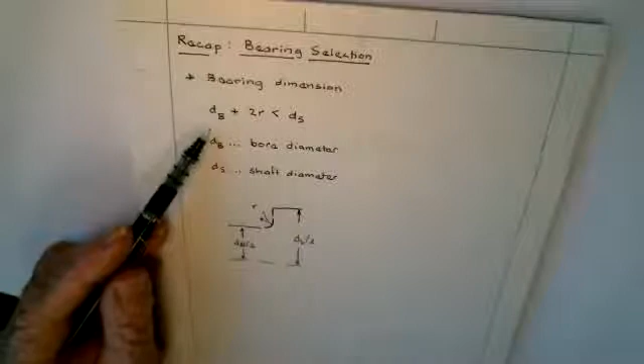So normally when you're picking a bearing, you know the size of the shaft that you're going to mount with the bearing. That gives you the diameter of the shaft, at least the part that you're going to put in the bearing. The shaft diameter may vary at other parts. Then you need to pick a bore diameter. Bore is the diameter of the inside of the bearing. It has to be smaller than the shaft, and smaller by an amount that's at least 2R. The most you can have is this R goes all the way up to the top. And so you do this from table 14.1.

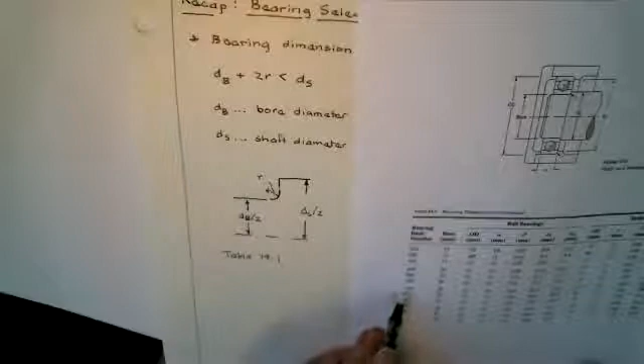Here's a bit of this table. Here's the bore of this bearing, here's the shaft, and here's this little R, which I drew a large version of. Let's say L means light capacity. 2 is medium light. This is extra light, this is light, and this is light to medium. This first number in the basic bearing number decides the load capacity, or groups the load capacity.

The next number is the bore diameter divided by 5. So this is 25 millimeters, or about a 1-inch bore. And so this could take a shaft where the shaft diameter would have to be 25 plus 2 times 0.64, so 1.2, so 27 millimeters or bigger, to satisfy this. You could pick other shafts here, and you could pick smaller bearings.

Usually you want just a snug fit in here, and you tap it in and it fits. Sometimes you use a temperature shrink fit, or you might put the shaft in dry ice and then stick it in there so it fits snugly. You want it to fit snugly because you want the bearing to adhere to the shaft, or at least the inner part in the race of the bearing has to adhere to the shaft.

Once you've done that, then you need to get a bearing that has sufficient life for your application.

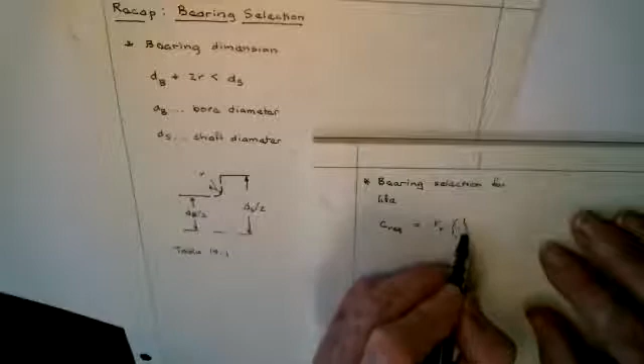What we've got so far is you have a certain required capacity, loading capacity that your bearing must be able to take. That's a standard radial load, or your radial load. The life you want over the standard life for CR, to a power alpha. Alpha is 0.3 for roller bearing, or it's 1/3 for a ball bearing. Here, CR, we'll see required. FR is the radial force that you've got in your application.

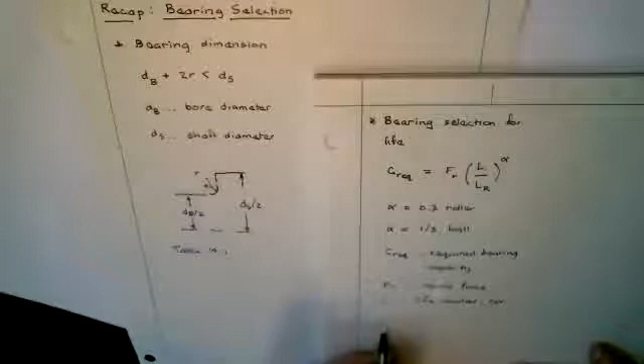You compute the life you want, typically in years, and you look at the RPM and figure out how many revs that means. That goes in here. As it gets bigger than this, it won't increase that rapidly because this power is less than 1, but nonetheless it will make the required capability for your bearing go up. And these are given in this table.

We did a small example of this, but this is the bearing rated capacity C. The LR is 90 times 10 to the 6, that's the same as 9 times 10 to the 7. This is for a 90% reliability. When they generated this table, 90% of the bearings were still going when it got to this life, and 10% had failed. This is the lowest reliability that you usually use for designing bearings. We'll increase that reliability, and there'll be a cost to doing that - you get a higher required capacity.

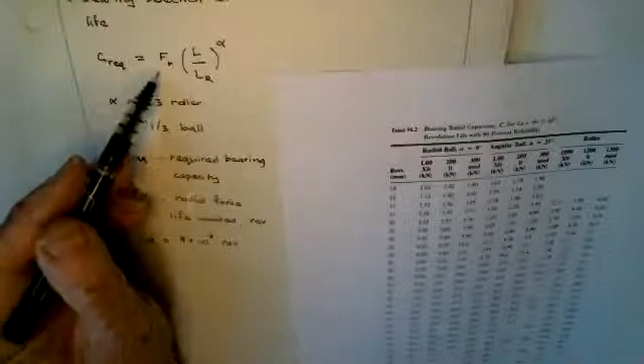In fact, that's the first thing we'll do. Once you've computed, we did a small example, and I'll review that. Compute your life, divide by the standard life, take it to this power, multiply by your radial load, and that's going to tell you what's required.

Suppose you got an answer of 10, and let's suppose 45 millimeters was your acceptable largest diameter. Then you wouldn't be able to use L or 200, but you could use 300. You could do 40 and 300, and you could do 35 and 300. But if 45 millimeters was the biggest bore you could have with the shaft you had, then you wouldn't be able to do extra light or light - you would have to do medium light when you pick off this list.

Quite often when you get to this list, you get more options than one. Generally speaking, you pick the largest one, but they're all acceptable answers. Let me talk about this reliability - you may well want a higher reliability. One of the ways I've seen people do that is take two bearings where one would do, and they both have 90%, then you sort of get to 99%, and when one of them goes, you can replace them one at a time. But there's other ways of doing this, so let me talk about that.

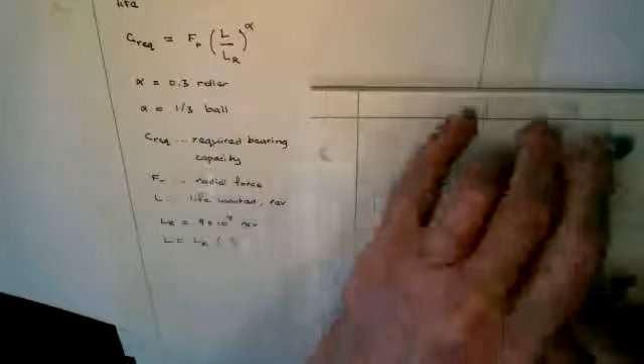There's a thing called a reliability factor. I can rework this and make it the life - well, it's not, this has to be C, really. What's going to happen is this life is going to be reduced when you make the reliability higher.

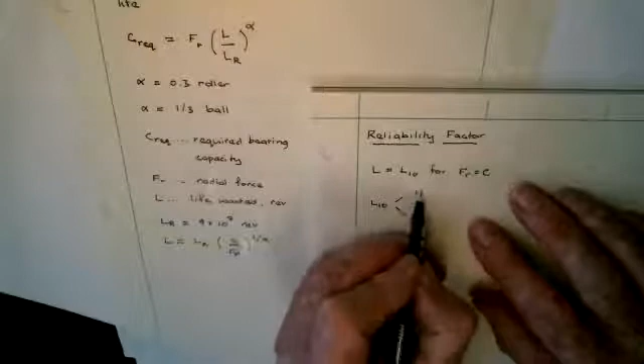When FR equals C, this is 1, and you get LR, and that life then is for 90% reliability, as shown on the top of this list here. What we're going to do is we're going to change this L with a K, with a KR. And KR was 1 for 90%. So your life is going to go down when you ask for more reliability.

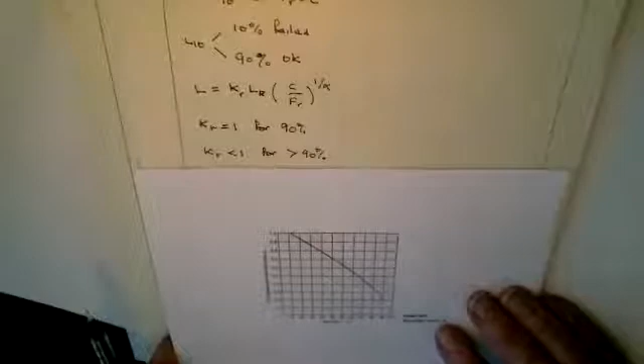The other way of looking at this is what's going to happen here - as this goes down, then the requirement for the load capacity is going to go up. This L would go in here, and here are values of this L. Get these from this figure, 14, 13. For example, if you had 99%, well here you can read this off at 90%, which is the minimum reliability, then it's 1. But if you wanted 99%, it's very close - about 0.2. So your life has gone down considerably, for the given loads.

We'll do an example using this factor and see what happens. It's not that unusual for people to want a greater reliability than 90%.

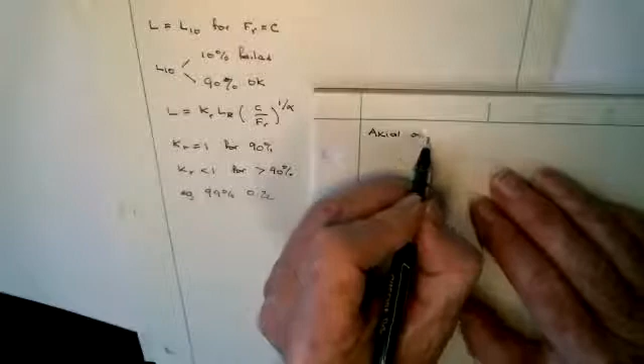There's another thing that happens with these bearings - you don't always just have pure radial loading. We're going to call this FT for thrust. So the radial loading, as the name suggests, was out radially like this. It typically comes from things that are driving the shaft, like gears or pulleys. Axial loading, if we look sideways at this bearing, is along the axis of the shaft, which then, with the fitting I showed you initially, goes into the bearing. It's a little bit dubious to use a roller bearing for this.

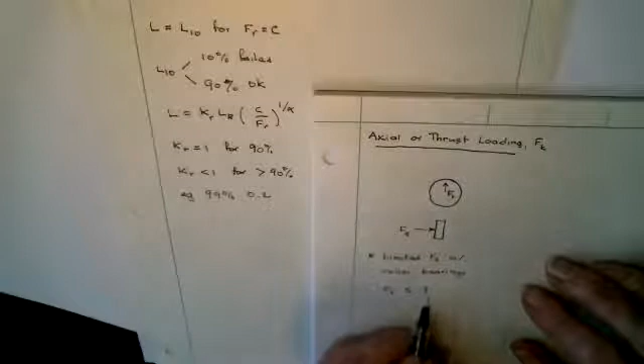There's nothing set up to take it particularly. I would say at most 20%. And sometimes FT is 0.

If you start to have some axial loading, you need to check with the manufacturer of the bearing to see what it'll take. The bearing I brought to school is made in India, so the numbers don't match. The numbers I've been giving you are for US or European bearings, but this one has no axial capability, it just pushes straight out. That's not uncommon, but there are bearings with little racks inside, and the rollers can take a little bit of axial load.

So by and large, we typically use ball bearings to do this. That expression is the thrust loading is less than or equal to the radial loading over 5, correct? That's right. Less than 20. I'm not quite sure where I got that. I don't think that's in the book.

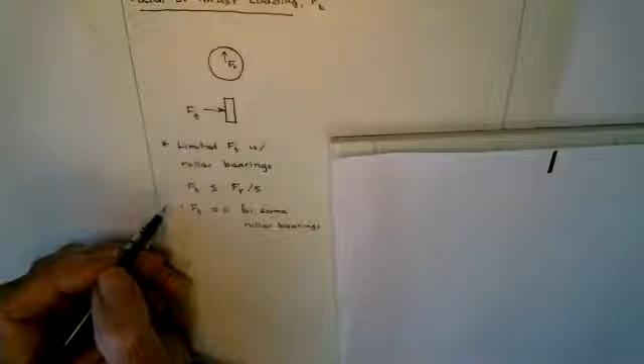But anyway, when you have relatively small thrust loading, maybe your roller can take it. But I'm telling you, what you want to do for this course is just assume FT equals 0 for roller bearings. In practice, you might contact the manufacturer and see what thrust loading his roller bearing will take, but it'll be modest. These thrust loadings can get quite big. So we're going to use ball bearings.

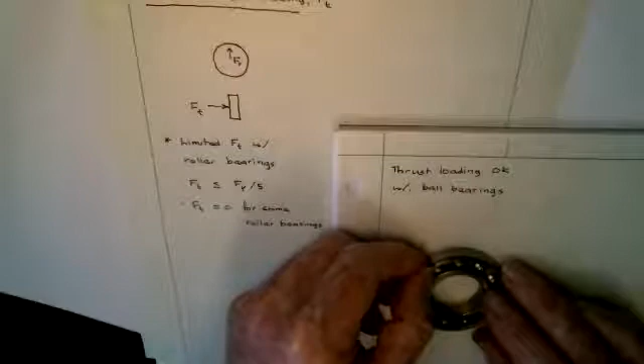You can sort of see this, though I doubt it will show on camera. These balls, which are separated, sit inside a little dip in the outer race and the inner race, not quite semicircular. So the ball itself doesn't go in and out, and this thing has some thrust capability. I'm pushing on it quite hard, and it's not giving.

So what we do then, we will have a loss in life. So we're going to put the force up to an equivalent force, Fe, which is greater than or equal to Fr.

If Ft is modest, less than 35%, then Fe just equals Fr. There's no effect. On the other hand, if you have high loading... does that mean FT is less than FR times 0.34, 0.35? I'm confused by that inequality. Yeah, no, that's a divide.

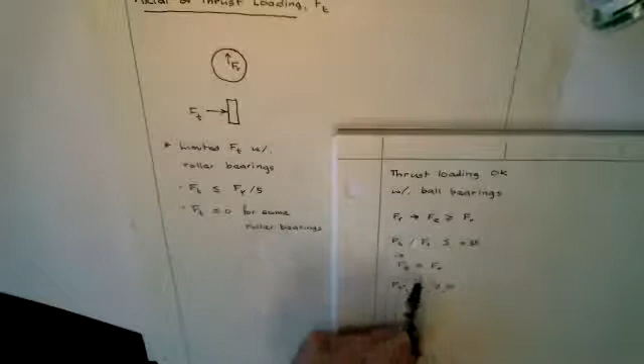That's given by equation 14.3, and I don't wish to write that out right now. We'll use this equation later. I'll get rid of the book in a second. This is an expression here. When Ft upon Fr is 0.35, this will just give you Fr, this will be 1. When Ft upon Fr is 10, then this part here turns Fr into Ft, multiplied by a number that's slightly bigger than 1.

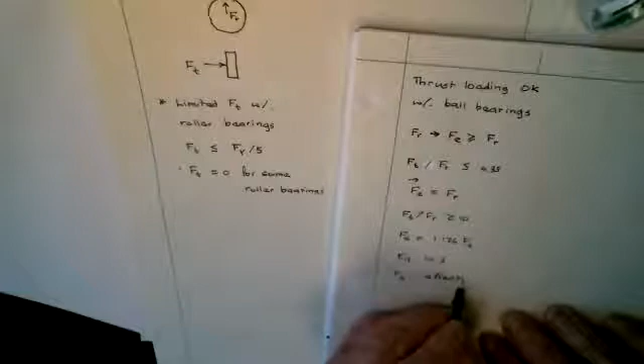What does Fe represent again? Fe, that's a good question. Fe is the effective loading. So when you've got expressions like this, you're going to put Fe in here for Fr.

These are radial ball bearings. What I just did was radial. There are some thrust ball bearings.

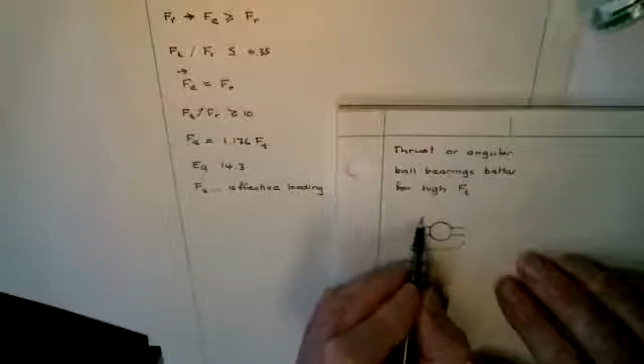The way these ball bearings usually look is as follows. When they're angular... that's a radial. When they're angular, this side comes down, this goes up, and it can transmit more force as a result. There's an angle here, and the one you've been given is a standard angle of 25 degrees.

Instead of 35%, you can get FT up to 65%, and you don't have to change FR. FE is equal to FR. And when you get this very high loading, then FE is a bit lower. And in between, you use equation...

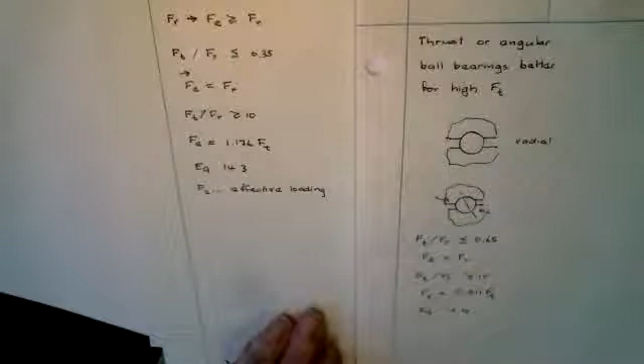14.4, which just looks like the previous equation. It'll give you these limiting values here, it's the same as in the book. It has FT over FR less than 0.68, I believe, not 0.65. Should we use 0.65? No, you're quite right, I made a typo. Yep, that's 0.68. So not quite double what the radial bearing was.

Now, you can do something like this with roller bearings too. The only bearings we're going to use in this course are radial ball bearings, radial roller bearings, and axial ball bearings. That's all you need to worry about. But you can do things with roller bearings. Let's see if I can show you this.

You can see that this thing here is sloped. When you put it in here, this will take the thrust loading in one direction. If you push it the other way, it'll come straight out. So in practice, there are ways you can get roller bearings to take thrust loading, but the straight roller bearing, basically, you're at risk.

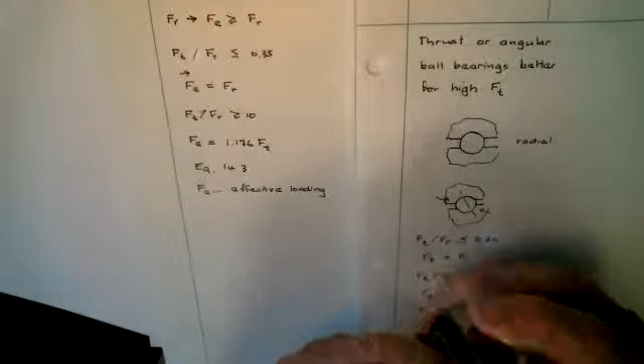The ball bearings do a better job because of the constraint on the rolling path. So in that case, why make roller bearings to bear a thrust load?

Some of these roller bearings can take very high thrust loads. Yes, it's a fair question. I would say this roller bearing - I don't know this for sure, I've tried to look these things up - but this is a Timken bearing. This one I could look up, but this is made in Japan, so I don't really know what they can take, but this will beat this. It's an effective way of doing it.

Why do that rather than an angular ball bearing? I'm relying on the last time I worked on this bearing selection. I think this takes actually slightly higher thrust loading.

I can't see what you're using. It's not in the picture. Your hands are not in the screen. Oh, I'm sorry, yeah, okay.

So this will take a slightly higher loading, I think. There will be some reasons why you would select this. When you do a problem, you wouldn't have to change your requirements too much to not have a radial angular bearing - you might be able to get a roller bearing and still get that in there and keep your friction down. Otherwise, then you're going to go to a journal bearing. But that's just my recollection, that this sort of bearing takes even higher axial loading than angular. I'm not 100% sure of that.

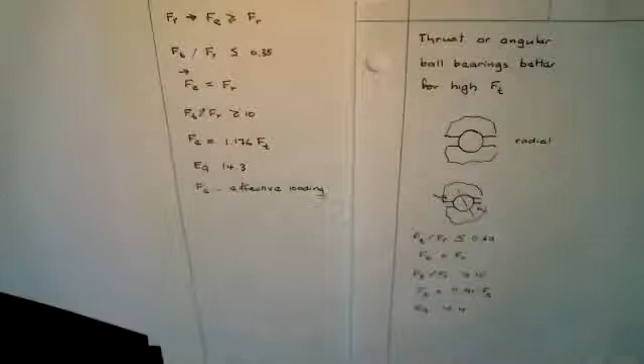There's another thing that happens with these bearings. You try to avoid this, but you can have some impact loading.

Now, when you think about your gearbox, impact forces - this should have been in machine design 1 - impact force is V root MK. You might want to say delta V, the relative velocity between two bodies that hit. This is the mass involved and the stiffness, the mutual stiffness. The stiffer you make it, the higher force you get. The more mass involved, the higher force, but it goes as a square root.

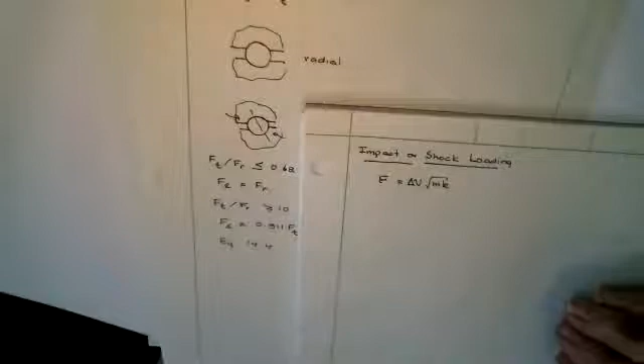And when you have a difference in velocity, it's linearly proportional to that. This is the engineering formula. There's a better way of doing it than physicists who use momentum exchange, which might get you an average. So when you change gears, even with synchromesh, when the two gears come together, there'll be a slight difference, and so there'll be some slight loading there. Now, one of the things that's forgiving about that gear example is that it only happens when you change gears. Once they're meshed, then there's practically zero impact loading.

What we're going to do is account for this by increasing FR by an impact factor. And if you have an equivalent FR because of thrust loading, then we'll increase it by the same factor. To have no impact, Ka is 1.

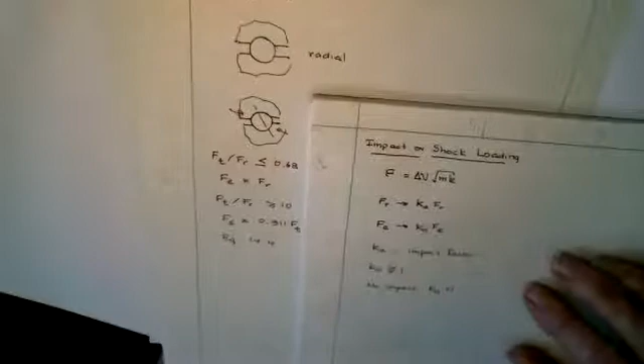If you have light impact, it gets up to about 1.5, and you get this from a table. What is light impact, greater than 1? Yes, 1 to 1.5. And you get this from table 14.3 - let me show you this table.

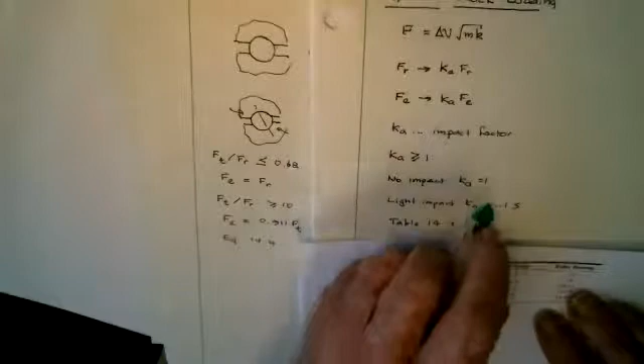It's on the same page. Uniform load, no impact, then you don't have any factor, of course. Gearing with ball bearings 1 to 1.3, and for the roller, no significant effect. Light impact 1.2 to 1.5, so I should have put 1.2 here to be consistent with the book. And heavy impact 2 to 3, so a major increase for ball bearings, and a significant increase for roller bearings.

What do you do when you're looking at this table and you've got this range? Well, in practice, you ask the question: how often does this impact occur? If it occurs a significant fraction of the revolutions - what's a significant fraction, more than 10% - then you use the high end. If, on the other hand, it only occurs once when you start things up each day, then you use the low end. So that's in practice. What do you do in this course? You do the conservative thing - just take the highest value of each of these.

Okay, so to summarize what we've just done, we have the following. Putting these things together.

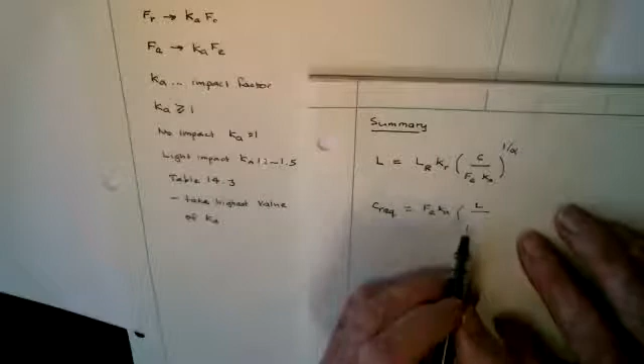So you can see the impact factor is going to increase the required capacity. The thrust loading is going to make FE go up typically, so it's going to increase the required capacity. This KR, this reliability factor, is going to make this number bigger, so it's going to increase this, and this will be to the power alpha.

So let me revisit the last example we did and put some of these factors in.

Dr. Sinclair, where would vibrations fall into this? Maybe—it's a good question.

The vibrations would probably just increase your loading. It's unusual for vibrations to be an impact factor, but you could put it in as a light impact factor, I would think. Now if the shaft is vibrating and it's hitting something, well then, of course, you're going to have a serious impact factor—that might even be high. But as long as it's not hitting anything, I don't think it has much of a factor.

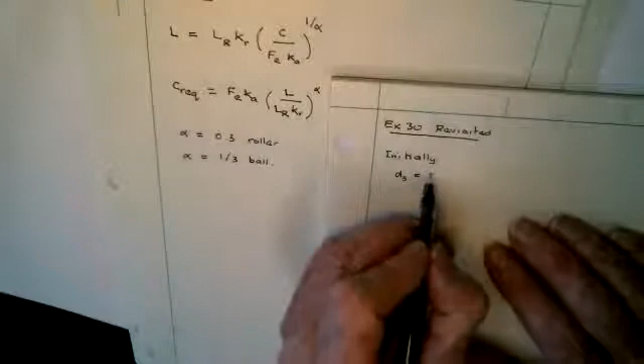Initially, we had the shaft diameter was 50 millimeters, FR was 1.2 kilonewtons. A kilonewton is about 220 pounds force, almost 5 kilonewtons to a kip, so it's a sizable force. It was going to run for 8 hours a day, at 1800 RPM, for 10 years.

And what I didn't tell you is implicitly, we're going to take a reliability of 90%. And we had to pick a bearing. I did this before, so I'll just summarize what we got.

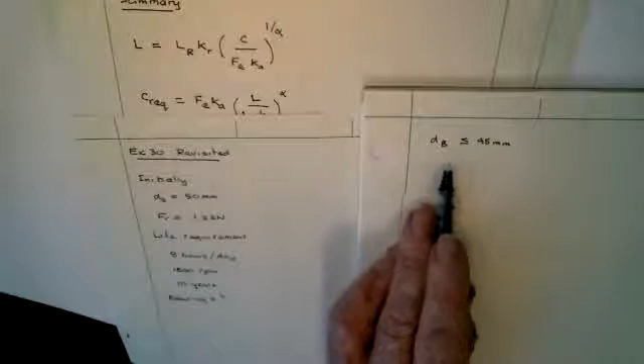From our table—I didn't print off the whole table—we went and found that if you had 50 millimeters, dB 45 plus 2R, whatever the R's were, I think they're about 1, was less than 50. So this would work. This was the biggest we could have; we could have something smaller than that.

We converted this life. We multiplied—this is revs—minutes to per hour for 8 hours per day, the number of days into years, and you multiply all these things together, and you get 3.19 times 10 to the 9.

So C required here would have been the 1.2—I've taken out a factor of 10 to the 7. And we were picking a ball bearing, I believe—yes, we picked a ball bearing. And we found that the required capacity when we did this calculation was 3.93.

And I picked up a bearing from this table that did this. 45—all of these bearings, I'll move this under—all the 45s do it. So any of these would do it, okay? You could go down smaller. Eventually, when you get down to 30 millimeter bore diameter, the light one won't do it, but these two will. And you can even go down further with the heavy duty, down to 20 millimeter bore diameter. So there's a bunch of bearings you could pick here.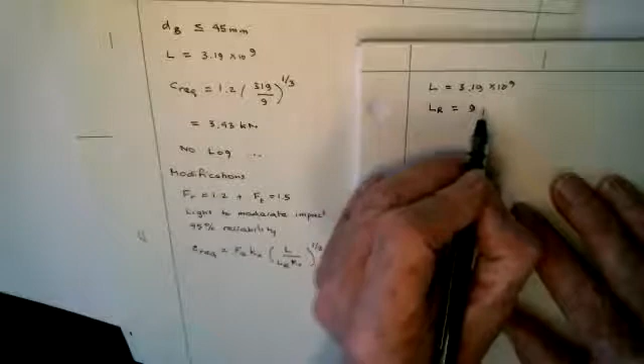So we've got to go get FE. Well, we know what L is, L was as before. And we know what LR is. We've got to go get KR.

We want 95%. So here's 90%, KR is 1. 95%, that's between 0.6 and 0.7, looks like about 0.63 to me. That's all the things in here. KA.

There's a ball bearing, okay, and we said light to moderate impact. Well, I think you would take the top end of light and the bottom end of moderate here. So if somebody tells you moderate to heavy, you take this midpoint. If they tell you heavy, you take 3, okay? If they tell you light to moderate, then you take the common point here, okay? If they just tell you light, you take 1.5. If they tell you moderate, you take 2.0. We always take the conservative, but light to moderate means we just take the common factor, the end point.

I have a quick question. Is there a difference between a radial bearing and a ball bearing?

Radial ball, the word radial, ball bearings, standard ball bearings are all radial, okay? The balls, the tracks are lined up like this. Well, my drawing leaves a bit to be desired, but the axis of the ball here, where you bisect the little circular part it's sitting in, goes out in the radial direction. That's perfectly radial, and I tried to sketch it before.

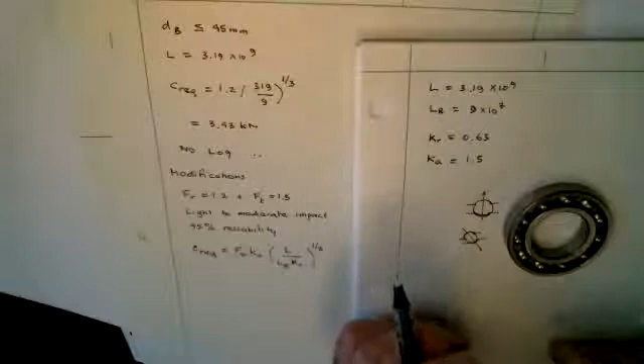Now we have to. Is that answer your question? Yeah, okay. Yes, thank you.

Okay. Now, so we've got this. Now we've got to go get FE, and I'll get that formula from the book, which I didn't write out before. It's quite lengthy. It's going to be between 0.35 and 10, so it's FR. Let me know if I make a mistake.

This is because, and actually it's also less than 10, okay, but you can see when FT upon FR equals 0.35, this is 0, so you just get FE equals FR, just as we agreed. Actually, if you take FT upon FR equal to 10, and you put it in here, you will get the same thing as I gave you before, 1.1 something or other times FT. So we got to calculate this now.

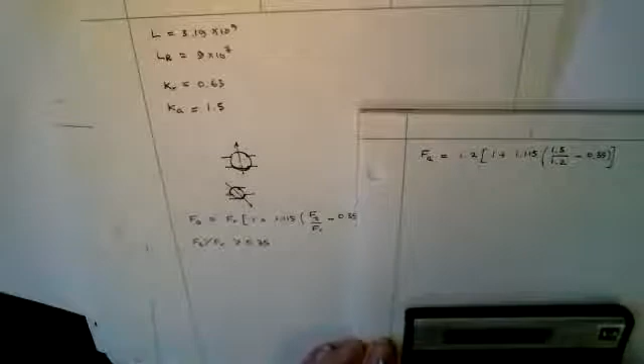So I substitute numbers: 1.2 for FR, we said 1.5 for FT. At 1.25, about 0.9, this is very close to 1. There's going to be 2, so it's going to be about twice as big. 0.9 times 1.

Yes, it's 1.003, so 2.4. So then the C required. That's for our FE. I'm doing this thing, KA 1.5. I've taken out a factor of 10 to the 7th, but this is times reliability factor 0.63. Well, that's obviously 3.6, but let's see what this is. 55.6.

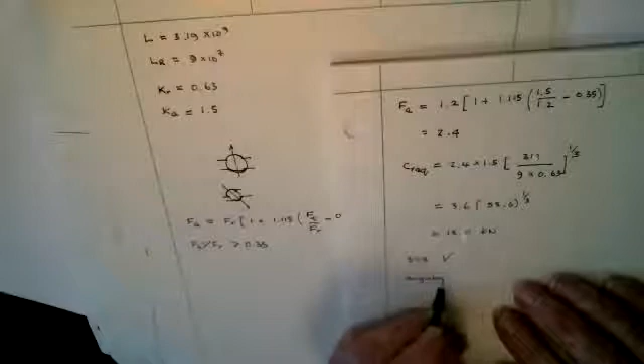Well, this KR, this reliability factor for 95%, that's independent of whether it's radial or angular, it comes from the same chart, okay? So it doesn't change. And KA comes from the same table, and it just distinguishes between ball and roller bearings, but it doesn't distinguish between angular or radial ball bearings. So since we said light to moderate, then we picked the common point between the two.

That's unchanged, but this FE changes. So now we get the formula. And the formula used to be FR was the formula here. Now the formula is...

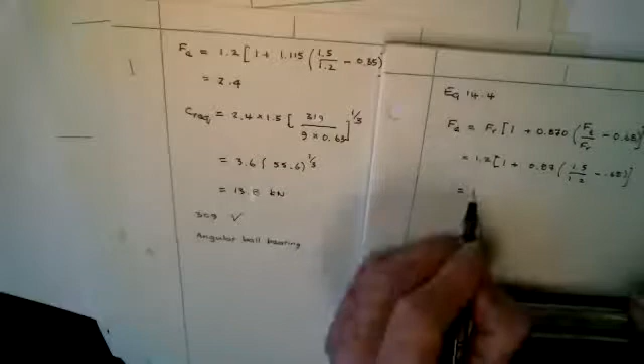Okay, so if we compute this now, 1.2... it's turned out to be 1.8 basically. It used to be 2.4. So what's going to happen is C required is going to go down. C required has FE out here in front. We just reduced FE by 25%.

10.4. Let me just put the office light back on.

So now when we go to our table, 45 millimeter bore is still the biggest bore we could have. We can't go higher than that. But we went 10.4.

Actually, the 200 would do it, right? It's right at it. Okay, and the 16 and the 300 would do it. We'd have two. But we have another two 300 level bore bearings with a smaller bore that would also work. 13.2, 11.0. So there's a number of bearings.

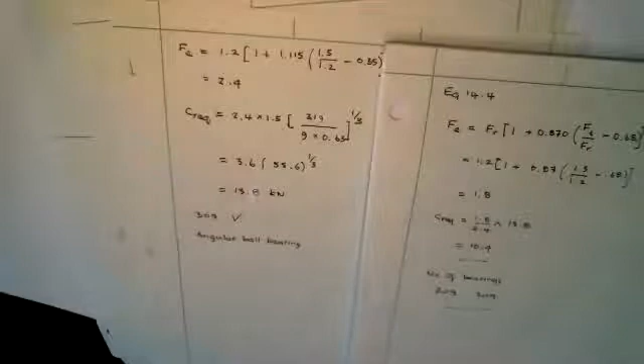Well, that's about all we're going to do on bearing selection. I'm going to move on to the next application. Do you have any questions before we move to gears?

Okay. What a lot of this sort of stuff is in practice is there's lots of looking up at tables to get the things that you want.

All right, well, the next application I'm going to look at is Spur Gears. This is in Juvinall and Marshek, chapter 15. What are we talking about?

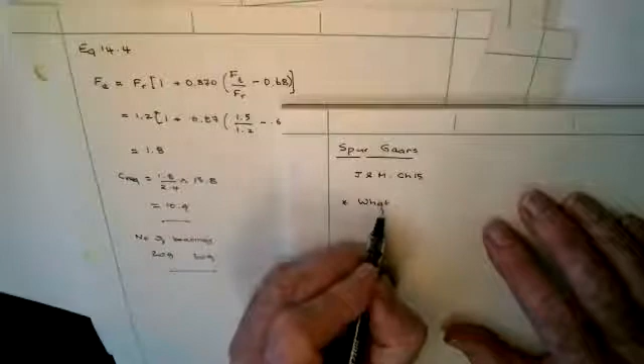Something like this, okay? These little spurs come out here. They're uniformly spaced around here, and you mesh this with another one, typically of a different diameter. So what we're going to have here - I'm not going to bother drawing all the teeth or spurs.

Although we'll look at this in a little more detail in a moment, you typically have a different size between two meshing gears. In which case, the bigger one has DG, pitch diameter.

And the G stands for gear. It's common to call the larger one the gear. The smaller one is the pitch, is the pinion.

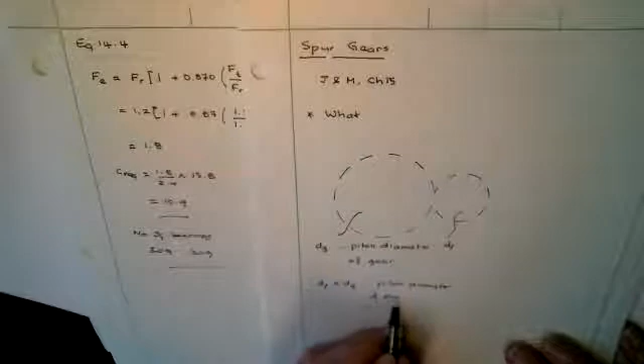If they're both equal, they're both gears. You'd have them both equal when you're trying to shift the line of rotation laterally without changing the speed.

And if we look at this in a little more detail, there's the following. Let's see if I can get this from here. Okay, so these things are curved shapes like this. There's a little radius there, okay?

Then there's a pitch point here, which you can think is - there's more than one definition of it - but as the point of contact. Well, contact actually moves up and down along this. We'll talk about that in more detail subsequently. But this is perhaps the mean point of contact you could pick out.

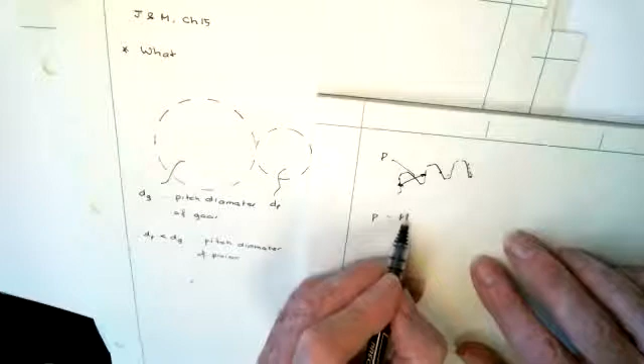Then the pitch is the distance from this point on this tooth to the same point on the next tooth. This out to this point here, to the center of the gear: DG or DP upon 2, okay?

So if we take the entire circumference of the circle of radius d upon 2, then its circumference would be pi d, and that'll be NP - number of teeth.

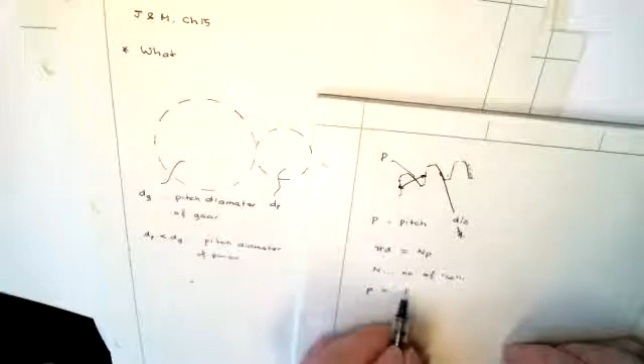Okay, so that means a D, or P rather. So for the gear I had here, D is about 4.5 inches. I counted before class, there are 30 teeth. So P is about .47 inches, nearly half an inch. It's a large gear. You can get smaller P than this.

There's another pitch which is used. This pitch here, P, can be in millimeters or inches. In the US, it's typically inches. In Europe, millimeters. Yes, I use - so that's changing.

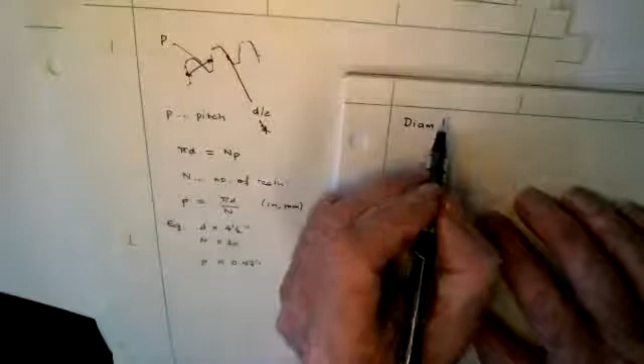But a common alternative definition, which is essentially equivalent, but you're going to meet this, is called the diametral pitch. I'm going to use the same symbol as the book, P - P is used for a lot of things. But anyway, P, and units are teeth per inch.

Well, we can solve these two for n. P, uppercase P. It's also n is lowercase p. So these two just equal a number pi. You lose the inches. So if they give you this, you can convert it to this if you need to. You may well not need to.

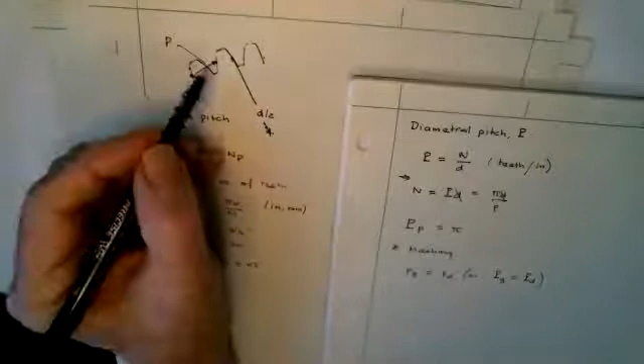Independent of which pitch you use, here's the requirement for meshing: that physically the separation between the teeth has to match. And I have this little figure here. When you're bringing in another gear, then this distance here has to match. That's sort of why I prefer this, but you can get the same result here.

That means that dg upon ng equals dp on np, where this is the number of teeth in the gear, the number of teeth in the pinion. This would be bigger than this, as with dp.

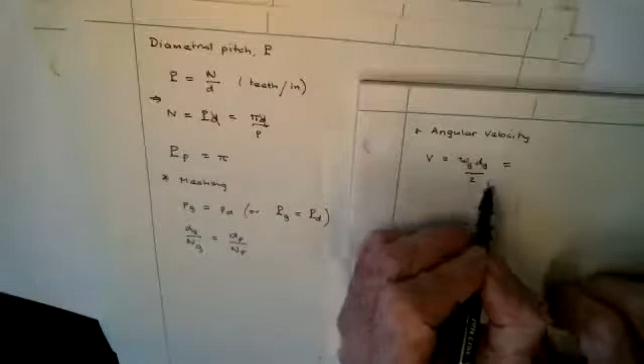The angular velocity of these - you have a common velocity at the pitch point, which is where we measured the pitch at the time. And so that common velocity would be v of the pitch point, and that would be omega g, dg upon 2. And it would, the velocity here, it's actually in the opposite direction, minus omega.

So this point has a common velocity v. If we say omega is positive clockwise, then this one's turning counterclockwise. You get a minus minus, and you get the same v.

So what we're going to have then is, for meshing, omega g, it's going to be d - and these d's were inversely proportional to n. Did I get this right? Half a second. It's going to be NP.

It should be N, over, yes. I'm sorry, D is... I was looking at this formula, looking at P. D is directly proportional to N. Yeah, I was about to write down something that didn't make any sense.

Okay, that's fine. If you have an even number of gears, 2 or 4, in a line like this, then you'll get a change in sign of omega. So if I had 2, then you get a change. If I had 4, another 2 here, then there'd be a change in sign here, another change in sign, then a third change in sign, so overall it'll be a change in sign.

On the other hand, if you have an odd number, then now it's going the same way. It started off clockwise, counterclockwise, clockwise.

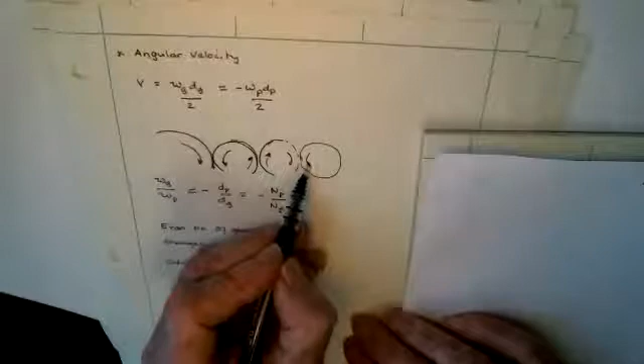Let's see, this would be up. Yeah, there's still a change of sign, right? This is still going down. Okay, there's a change. This one here is going the same as this, so there's an odd number, 3.

Dr. Sinclair, on the previous page, on the expression you had for meshing, you had P subscript G equals P subscript D. Did you mean for that to be P subscript P for pinion? Oh yes, yes.

I can tell you why. More often than not, you drive in the pinion, so you call it a D, but no, that's to be consistent with what I did. You're quite right, it should be P. Okay, so quite often the incoming drive is from a pinion, and so sometimes you put a P sub D, but I hadn't done that. What I did was incorrect. You're quite right.

There are gear forces. If time permits, we'll deal with these a little bit more because these are going to have bearings on life.

I tried to draw that tooth using the actual gear. It's got a shape like this. The resultant force is not normal to the radius, okay, and so there's a radial force and a tangential force.

And these are on it: when you mesh your teeth, you have essentially contact on one set of teeth, one from the pinion and one from the gear. Okay, and then when that starts to cease, the contact starts with another tooth. That's not 100% correct, but it's pretty close. And these two are related by a pressure angle.

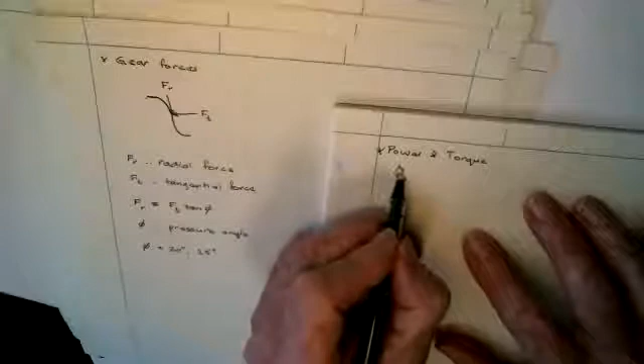However, when it comes to power, and you get that from torque, and the torque is all generated by Ft. Well, now I'm going to put a hat on power just to distinguish it from this other pitch, the diametral pitch. So it's going to wear a hat, and that's just T omega. Okay, power is force times velocity, or in an angular situation, it's torque times angular velocity.

And T is going to be driven by this Ft. It's going to be Ft times the radius. Okay, you can turn this around and you can get this tangential force from the torque you're transmitting.

One last element of these introductory notions about gears, let's talk about efficiency for spur gears. Here's the power you get out, divided by the power you put in.

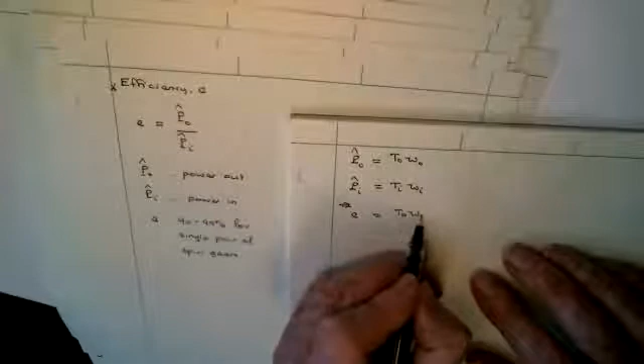If we use this efficiency, we can use this: that's going to be the output torque times the output angular velocity. And likewise, there's the input torque, so therefore the efficiency, or you could make the output torque, which is what you often want, is going to be the efficiency times T-I times omega-I over omega-O.

Just to get the magnitude, we can switch these up, inversely proportional to the number of teeth. I'm not keeping the sign here, okay, N-O over N-I, so it's magnitude only. These torques are going to change direction just like the way omega did.

So to summarize what we've covered so far, we have the following for Spur Gears. And I'll do an example.

That's the pitch, which is the physical dimension between two teeth. Here is the common diametral pitch used in the US.

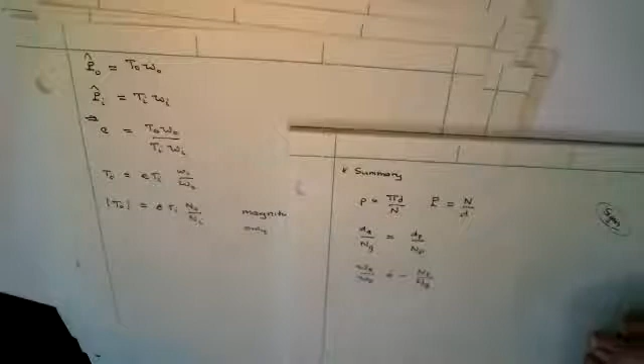Angular velocities with one pair of gears, you get a sign change, and they're inversely proportional to the number of teeth. This is G upon P, this is P upon G, that's not a mistake in sign, it's just for one pair of gears. If you get enough of these signs, an even number, then there won't be any change.

When we start to design bearings for these gears, shafts, then we'll need to start computing these forces and getting resultant forces. The torque that creates the power is really due to the tangential component of the force.

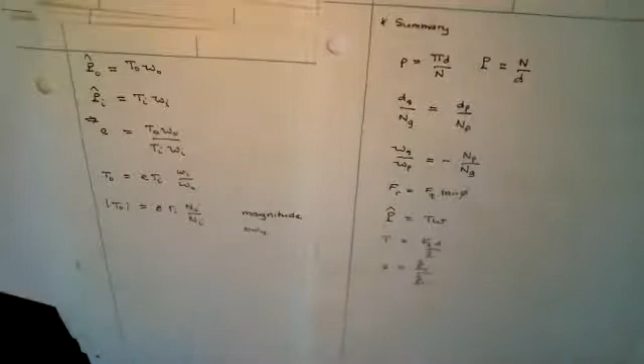Efficiency is the power you get out from the power you put in, less than one, but not that much less.

This is magnitude. Well, let me do an example of use for you. Let me show you what I mean by reduction gear set, though there's more than one of these.

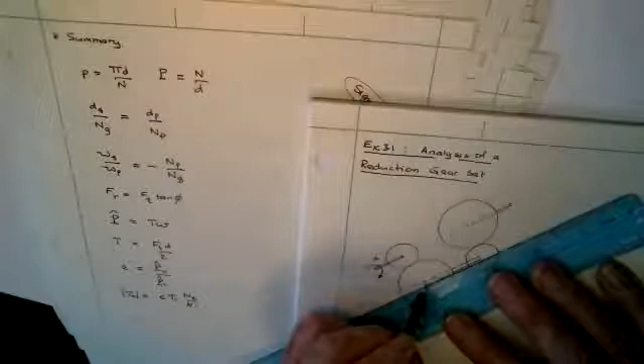So I'm going to drive this pinion with a motor. There are 3 shafts here. Just to keep things simple, I'm going to keep this, which will help line these axes up.

Now there'll be a sign change in omega here, and that'll be reversed back here, so this is going to spin, the output here is going to spin in the same direction. This is not in defiance of what I said earlier about an even number. It's an even number in a set of gears all joined, okay? This is 2 sets, okay? And there's a change of sign here and a second change of sign here. So this thing here is spinning the same way.

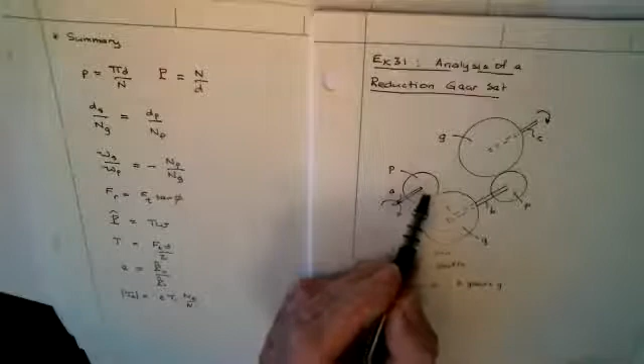Of course, as this does a revolution, the small gear only does a part of a revolution. And then as this small gear does a revolution, this thing does only part of a revolution. And so that's why it's called a reduction. The speed goes down.

What will happen then is we'll lose some power because of efficiency, but then the torque will go up. So when you have a reduction gear set, it's common practice, you have a high revving motor, the revs will go down, the output revs will be lower, but the output torque will be higher.

Here's some specifics for this gear set. The pinions, given in US units, P equals 5. The number of teeth is 15, and phi is 25 degrees.

Since you're going to mesh this, then you don't really need to write this, but P will again be 5, and phi will be 25. Okay, otherwise you will have poor meshing. Well, in fact, you won't mesh. But N is 45.

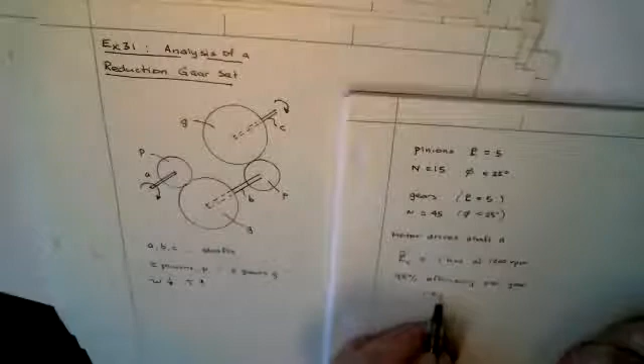I would like to find out what the output is from shaft C. Okay, so what we've got to do is get a little shopping list of things we have to do here.

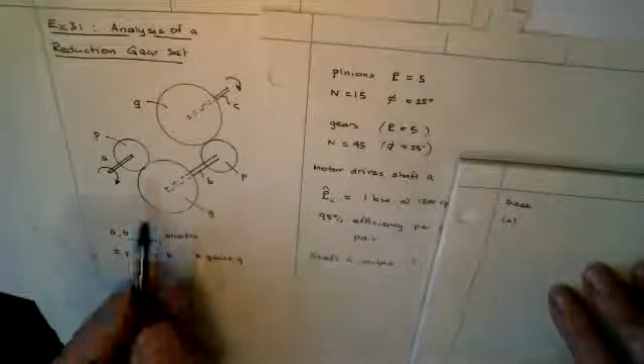What we see, well, part of the output will be what's its omega. And to get that, we're going to have to get omega for B and C. Then if we want to talk about output, we want to know what torque is. We'll have to get that for A too. And we want to get the power that came out, at least in this first exercise.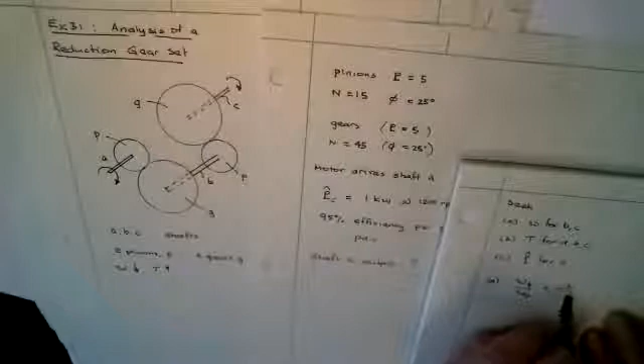So for A, this is a G, this is pinion. It's minus NP over NG. So omega B, which is the gear, equals omega A. This was 1200 RPM, which is a standard unit to give angular velocities for gears. When we start to work out power, we're going to have to convert from RPM to radians per second, but when you're talking about output, then RPM is the standard thing. The minus sign means in the opposite direction. I gave this direction, but irrespective of whichever direction I gave here, this is the opposite. And this is NP, the number of teeth in the pinion, over the number in the gear, is 45. This is minus 400.

Likewise, omega C, it's the same arrangement. It's minus omega B times NP over NG. So you'd reduce this again. 400, 133 divided by 3. And now, to answer your question, the key thing is this is the same direction as A.

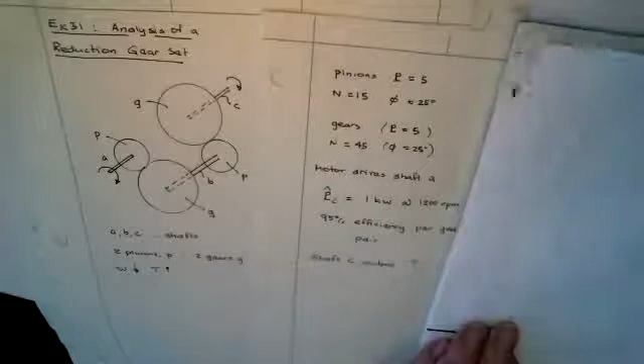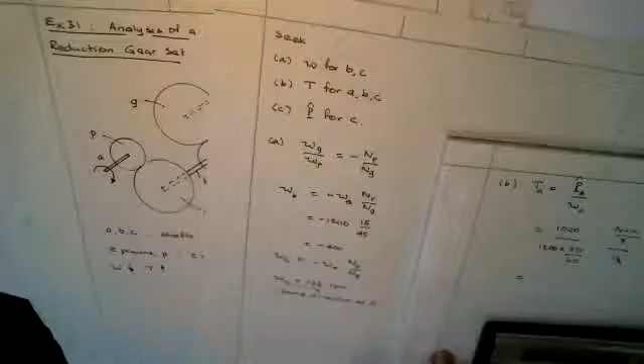We get T, and the 1 kilowatt, which is 1,000 watts, and a watt's a Newton meter per second. And now omega has to be in radians per second. So we're going to get the torque out in Newton meters. We've got 1200 RPM, we have to convert that to radians, 2 pi per revolution per second. 7.96 Newton meters.

Now what's going to happen is TO for a given gear pair is E, the efficiency for that gear pair, times TI. The efficiency we're given was 95%, so this would be TB, this would be TA. This is the number of teeth, and B, 45. So there's a bit of a loss for the efficiency, but nonetheless, it's approximately 3 times bigger.

Dr. Sinclair? Yes? Could you move the paper left a little bit? It's getting a little hard to see. Sorry. Thank you.

TC is the same thing. Again, it's 0.95, now it's TB. We have the same ratio. 64.6. Hasn't quite gone up by a factor of 9 because of the efficiency, but close.

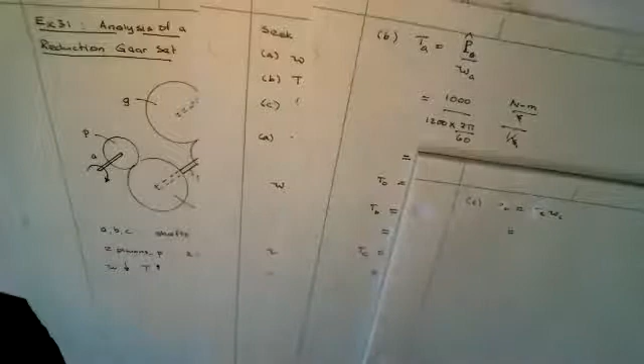And so to complete the power then, C, sorry, P out. This is going to be the 64.6 times omega C. Omega C was 133, and now that's RPM, so it's times 2 pi over 60 to get radians per second. And this will be in watts.

I get basically 900 watts, which is about what you'd expect. There's a little bit of round off in this number, I think. Yeah, that'd be 902.

Okay, so you could get this power just by taking the power in and multiplying by E to the number of gear pairs you have. Okay, well, we'll do a bit more of this.

One of the things you'd have in a set like this that you'd have to design, but you have to design bearings for this shaft, and this shaft, and so on. And these bearings are going to experience the radial and tangential forces that are going to come in and give you a resultant force on the bearing, which you'd have to design for. That'll be a radial force on the bearing, okay? Even though it'll be a combination of both forces, a resultant force on the gear. And we'll perhaps do that next time. Are there any questions on that?

So just sort of recapping here. Sorry if I'm running a little bit late, but this is the basic thing that's happening. When you have gear angular velocity, they're inversely proportional to their number of teeth. Okay, this is omega G upon omega P. This is NP upon NG. Okay? Don't put the G here and the P there. Okay? And you get this minus sign. And then power is just torque times omega. Torque is given by the tangential force. Okay? And what you're going to do to get output torque is you're going to take account of the efficiency, and then it's going to go as NO over NI. Okay? That's what the output torque is. That's what happened here. There's more than one way of getting this answer. We could do it this way or this way. Okay? But they should be consistent. Are there any questions on that?

That was a wee bit hurried at the end there, but I think that's a pretty simple example. We'll perhaps come back and design bearings for this. Okay, if there's no questions.

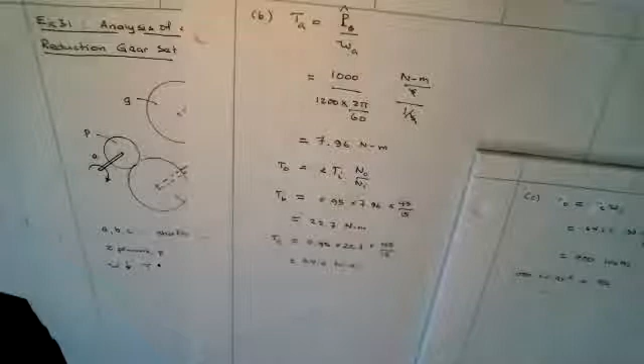In part A, getting omega C, you said negative omega B. I'm just making sure, I couldn't read it very well. Yeah, yes, omega C is minus omega B. Okay, and omega B was minus, so the two minuses make a plus. Okay? Okay. And what I tend to do in these is I draw the way these things go myself.

So that's clockwise, so you can see it immediately. But you can carry it with the sign conventions, and I'll think about whether there's a preferred sign convention or not. Most people, if they're analyzing a gear set like this, will just tell you the input is such and such, so much horsepower, so much RPM, and the output is such and such at certain horsepower at a certain RPM.

And you say same direction or opposite. Reduction sets like this always reduce things at the same direction. This is a common reduction set. You can just have two in a reduction set. When you have two, then of course you've shifted where your shaft is, and quite often you want to maintain your shaft.

If you think about your drive shaft down the center of the car, it goes through a gearbox. It comes in at one point to the gearbox and comes out at exactly the same point. It comes in from the engine and goes to the rear, typically the rear wheels, and that's lined up. So you have gear sets like this within that gearbox, which don't end up shifting the input shaft line of action.

Any other questions? I have a question about the Moodle for this class. We haven't been able to see it since about Wednesday, and I wasn't sure if there's something that needs to be done on our part or not.